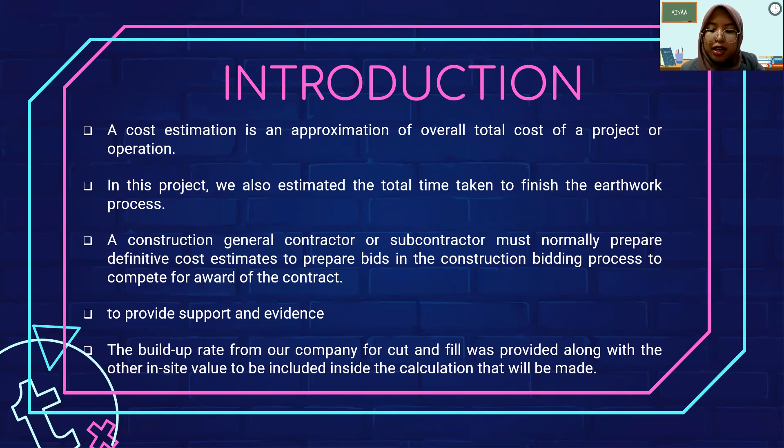So for our scope is to describe a proposed cost estimating for earthwork for project LWX Consultant Sdn. Bhd., and a proper work procedure shall be carried out during the excavation stage as per specification and contract drawings. It includes the approximation of total cost project, selecting suitable materials, and value engineering.

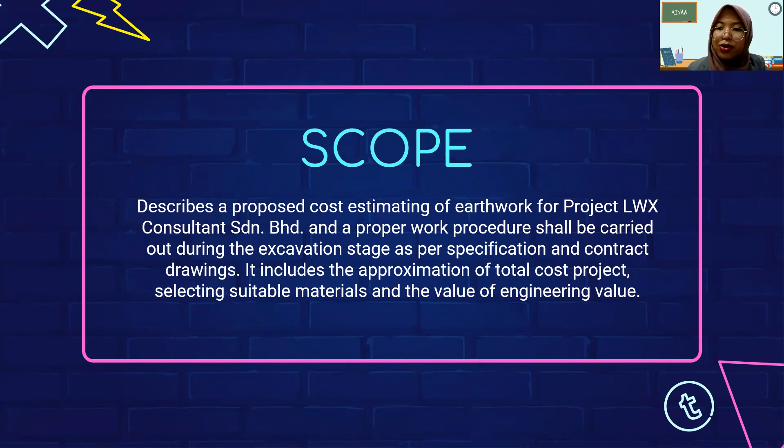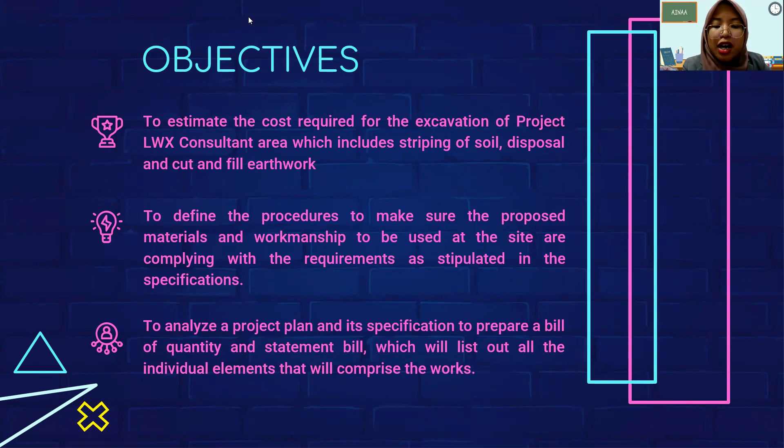So our objectives are to estimate the cost required for the excavation of project LWX Consultants area, which includes stripping of soil, disposal, and cut and fill earthwork. It's also to define the procedures to make sure the proposed materials and workmanship to be used at the site are complying with the requirements as stipulated in the specification. Last but not least is to analyze a project plan and its specification to prepare a bill of quantity and statement bill which will list out all the individual elements that will comprise the work.

So for earthwork, the first one is site clearance. Site clearing involves the removal of trees and the clearing of the land, which may require professional engineering equipment, where it is a more rapid and efficient method rather than clearing the land manually. It involves cutting of trees, removal of stumps, tree disposal, excavation of topsoil, and transportation of the removed topsoil. In a short sentence, the whole site needs to be cleared to the extent as shown in the drawing.

The next one is cut and fill. Cut and fill is the process of moving earth from one place to another to make the ground more level. A cut is made when earth is cut from above the desired ground height, and a fill is when earth is used to fill a hole in the desired ground level. For compaction, all material used in the fill platforms should be compacted as soon as spread.

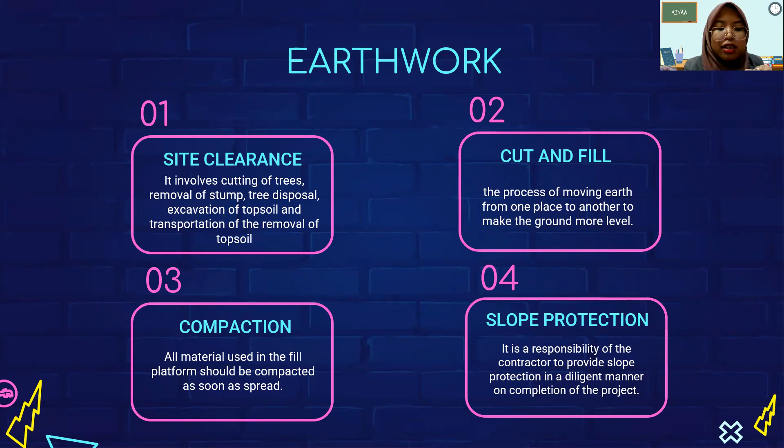And lastly, for slope protection, it is a responsibility of the contractor to provide slope protection in a diligent manner on completion of the project. All exposed earth slopes should be protected with a permanent protection and should be approved by the safety officer.

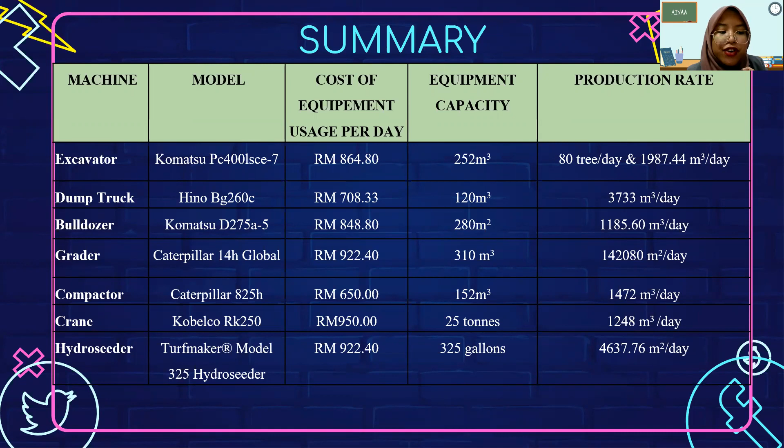Next, we move on to the cost of earthwork equipment and operating. So as you can see, I have listed all the equipment cost usage per day, equipment capacity, and the productivity of the equipment. You can pause the video to look at it more closely. So we use the rent cost for all machineries. This can lower the initial investment, give access to a broader range of equipment at all times, the latest equipment is usually offered, and maintenance and insurance are handled by another party.

And this is the summary of the lubricant, the diesel, and labor wage. As you can see, we have skilled labor and semi-skilled labor, all according to CIDB 2018 labor wages.

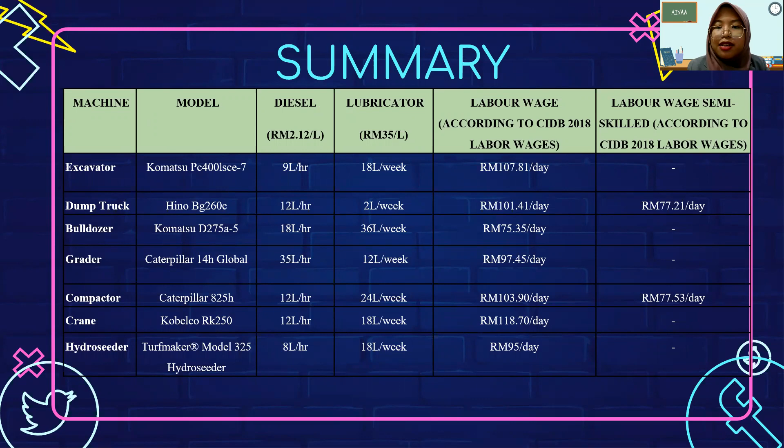So from earthwork department, we get from a total area of 567,869.481 meter squared, we get a total volume of cut and fill of 430,312 meter cube. For cut is 224,010 meter cube, while for fill is 206,302 meter cube. So the difference between cut and fill volume is 17,708 meter cube. The percentage difference is around 7.91%, which is lower than 50%.

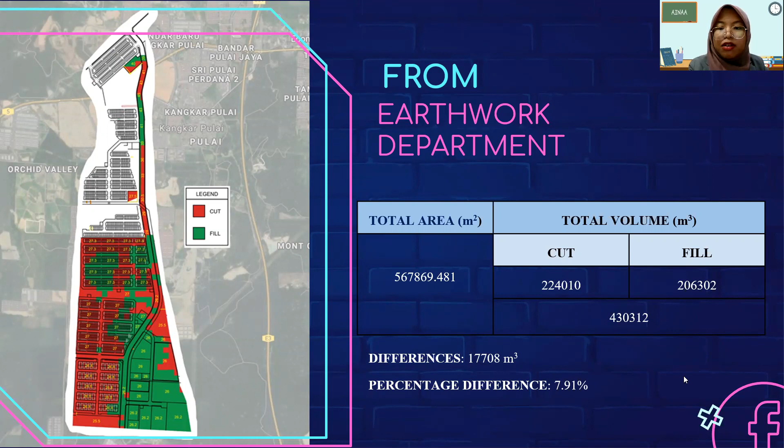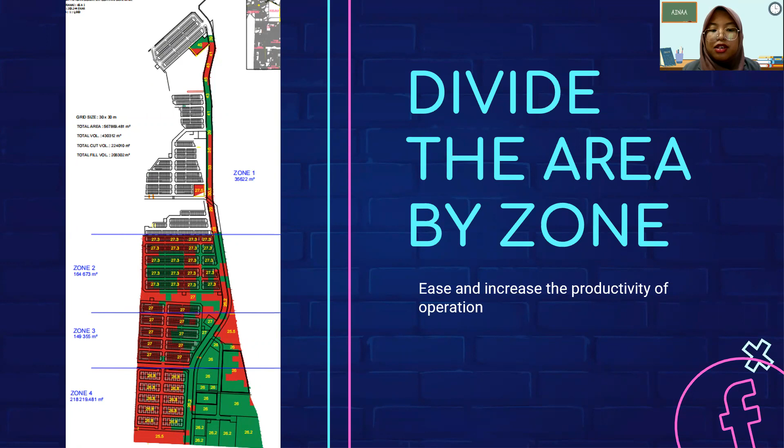In addition, we only use cut and fill work using the zone to ease the work and to calculate the transportation cost. So after dividing it by zone, for zone 1, we get a difference volume of 14,769.45 meter cube, which needs to be filled.

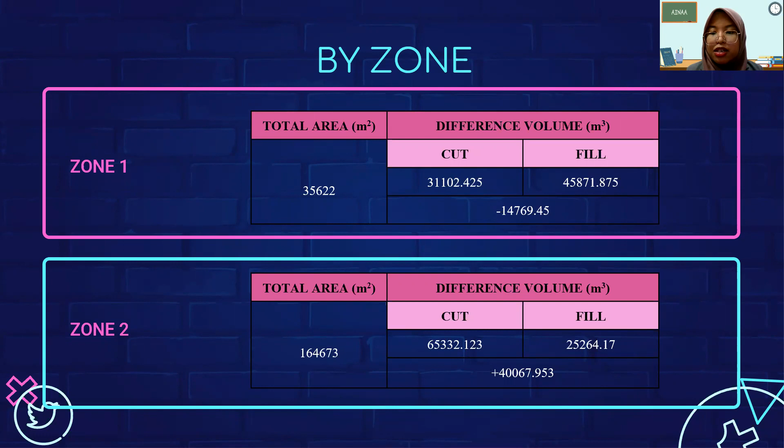And at zone 2, the difference volume is 40,067.953 meter cube, which is excess cut. So we can transfer it to the other zone. And for zone 3, the difference volume is 4,557.668, the excess cut. And for zone 4 it is 12,147.932. It needs to be filled.

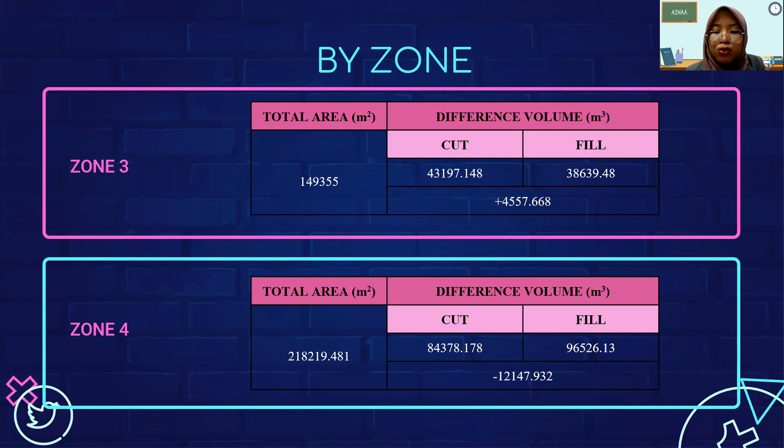So as you can see, on my left side is the average distance for every zone. It is used in the calculation of transportation of soil. So we have calculated the average distance using the average of maximum and minimum distance on every zone, and of course for the transportation from one zone to another zone.

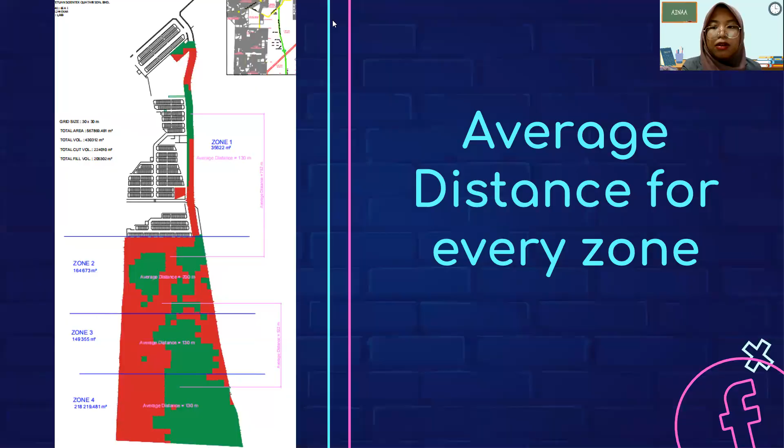So this is the initial cost estimation. The first one is site clearance. Using the total quantities, we get the total cost of 990,678.89 cents. And for the cut work, we divided it by zone. We fulfill the cut work by zone. So it is the total of 166,321 ringgit 80 cents.

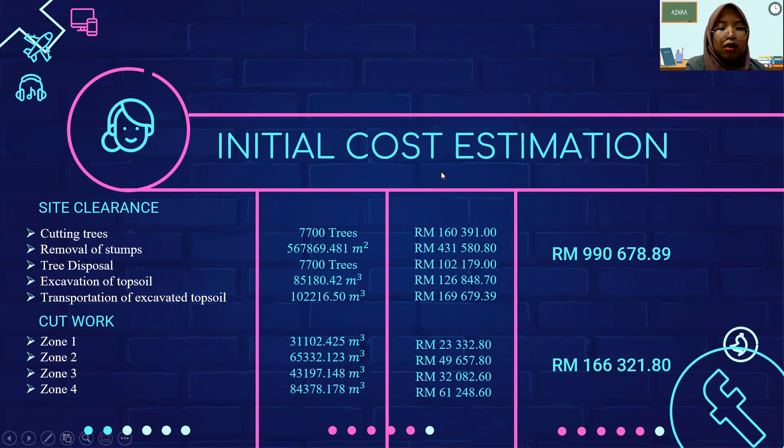So for transportation of soil in between zone 1, in between zone 2, from zone 2 to zone 1, from zone 2 to zone 4, and in between zone 3, and also last but not least, in between zone 4. So the total cost of transportation of cut soil is 2,321 ringgit 64 cents. So for fill work, we do the fill work by zone, which concludes the cost of 316,276.8 cents.

So for finishing, it consists of compaction and grading. So the total cost of the finishing is 227,826.24 cents. And for disposal, we use the JKR. The total cost for disposal of the excess soil is 95,623.20 cents. And last but not least, the slope protection. It costs us 14,335 ringgit and 46 cents.

So the total overall cost for initial cost estimation is 2 million, in overall 2.3 million. So this is the estimated number of days, which is after we calculated the total cost, the total number of days for initial cost estimation is 105 days.

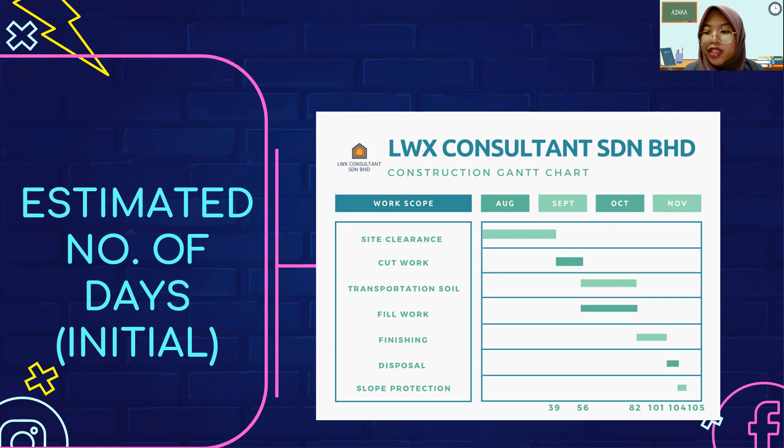For site clearance, it consists of 39 days, followed by the cut work, 17 days, and followed by transportation of soil and fill work, which will be done simultaneously. It's in 26 days, and finishing for 19 days, disposal for 3 days, and the slope protection in just 1 day. So the total is 105 days.

So for value engineering, step one, we change for value engineering for cost reduction. We apply value engineering in our calculation to reduce the cost estimation for the whole operation and to increase the productivity of the operation. So after considering various changes to be done, including strategy, operation, and number of equipment used, we managed to get reduction of our operation.

Okay, so these are our changes after calculation. So for the first one, we changed the number of machineries and laborers. So we remove the use of excavators from our transportation of soil, since our excavator from cut work can cater and manage to directly transfer from the cut work to the dump truck. And also, some of the work can be done by the semi-skilled laborers rather than skilled laborers. The same capability to complete work can be done by the semi-skilled laborers.

So the next one, we change the number of machinery used, and also we change our operation strategy. For example, for the cut work, we did not use the zone as an alternative. We just do the work for the whole zone A for the cut work. And we also lower our profit from 20% to 15%, because after discussion with our group, we think that 20% profit is too high and 15% is ideal for earthwork operation.

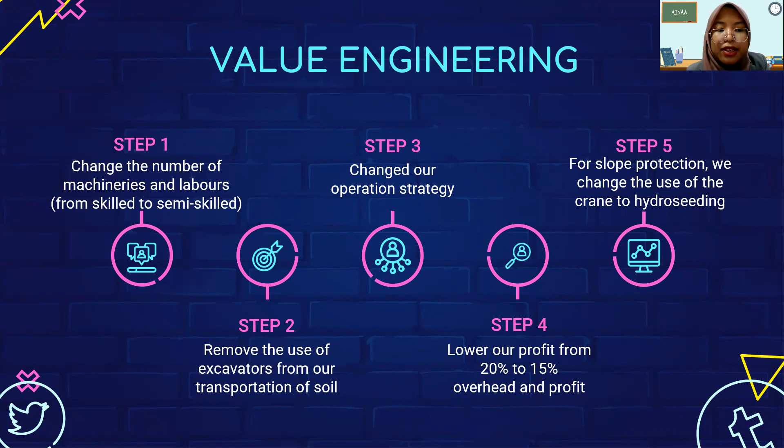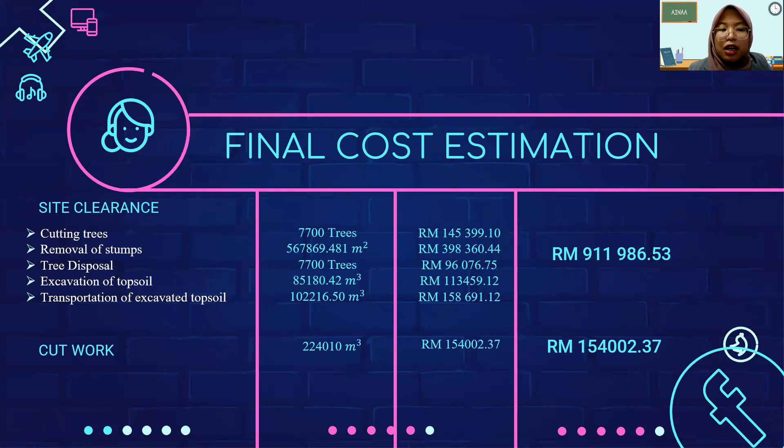And last but not least, for slope protection, we change the use of crane to hydroseeding. It is better to ensure the slope can be protected just by hydroseeding. So this is the final cost estimation. As you can see, for the site clearance and the cut work, we fulfill the cut work using the whole zone. We did not use the divided zone like before. You can see it reduced the cost, and transportation of soil, fill work, finishing, disposal, slope protection.

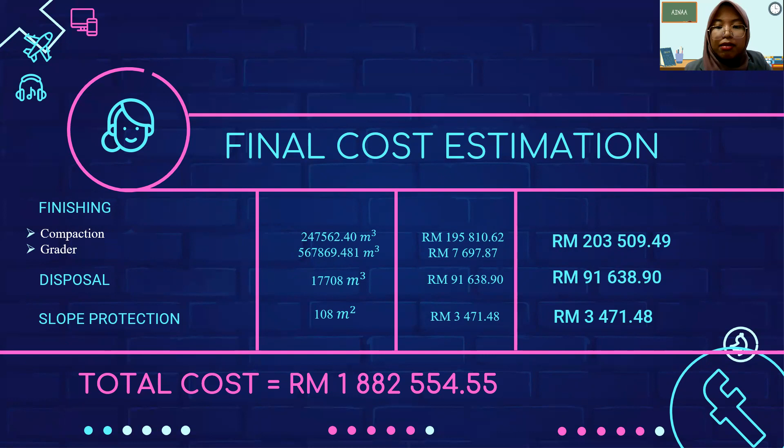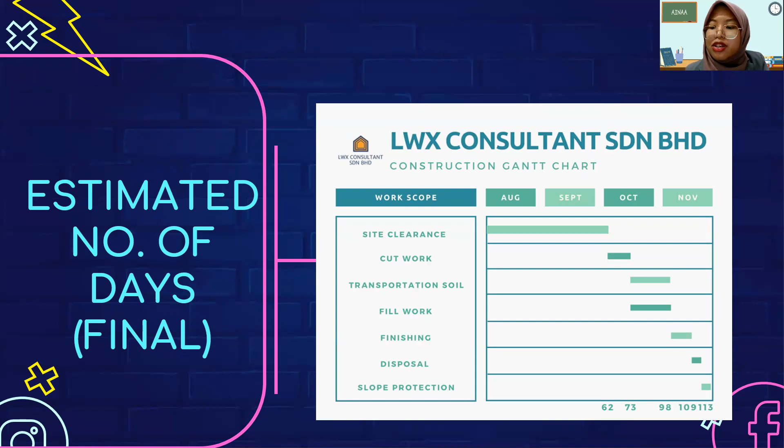So the total cost for final cost estimation after we apply the value engineering is around 1.88 million. So the estimated number of days for the final cost estimation is around 113 days. So the site clearance consists of 62 days, followed by cut work in 11 days only after we apply value engineering. And for transportation of soil and fill work in 25 days, finishing in 11 days, disposal in 3 days, and slope protection in 1 day. So it's the total of 113 days.

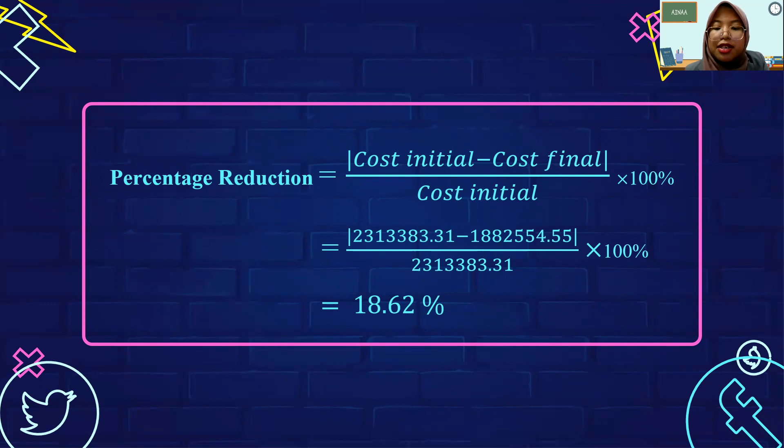So the percentage reduction, after we calculated, we get 18.62% reduction. So overall, we believe that our total cost for final cost estimation is the best cost that we can offer to you for the estimation of the earthwork process.